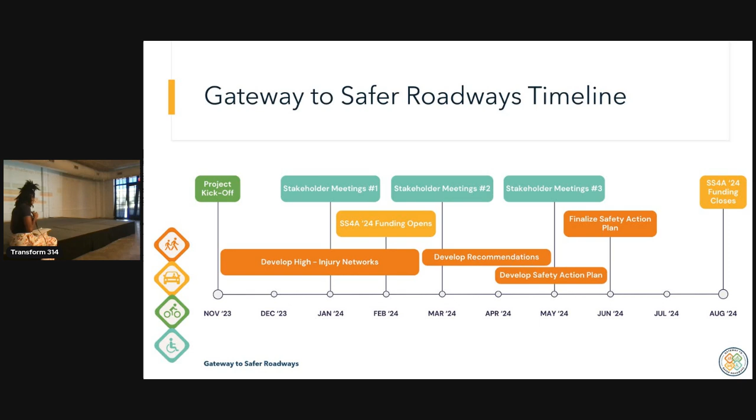Next slide, please. Going back to the funding, why we even applied for this in the first place: roadway crashes are the leading cause of death for ages 8 to 20 and for young adults, and the second leading cause of death from unintentional injuries in the US.

So it was very critical that we come up with this plan. To give you some numbers, from 2018 to 2022, our region had 9,576 fatal and serious injury crashes. And like I said, it keeps getting worse.

Next slide, please. For our action plan, we reviewed the best practices happening across the nation. We engaged with local stakeholders through multiple groups and task forces. We also completed a safety analysis on crash data for the whole region. All of this together makes up a well-rounded safety action plan for the region.

We had a consulting group called Equitable Cities, out of New Jersey, Black-owned, I'd like to note. They helped us make sure equity was woven all the way through the process. That's their specialty, equity first.

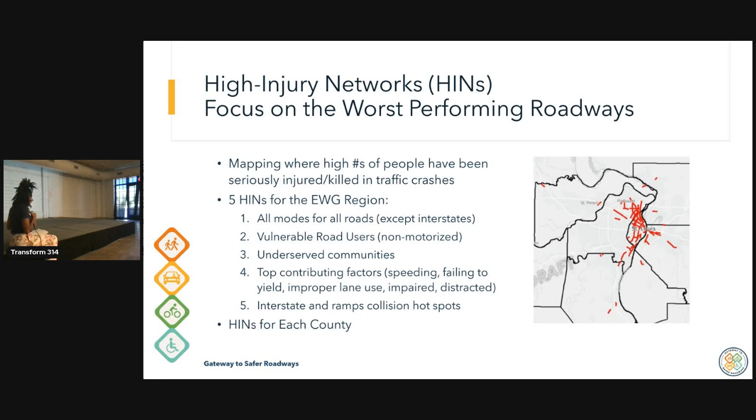Yeah, it's mostly just around the urban core. And so some of our more rural counties, they didn't really show up on the injury networks, which is a good thing, that they don't have a lot of fatal and serious injuries, but we wanted to make sure that with this plan, they could still get something out of it. I'm not sure if y'all been through Franklin County before, Jefferson County, but it gets dark. That's not some place you want to be walking. So we want to make sure they have what they need as well. Next slide, please.

So this map, again, it's a little hard to see, but this is our regional all-modes high injury network. When you get the slides, you'll see some lines in red, which are our top 10% of fatal and serious injury crashes happening in the region. The orange is the top 25%, and the yellow is the top 50%.

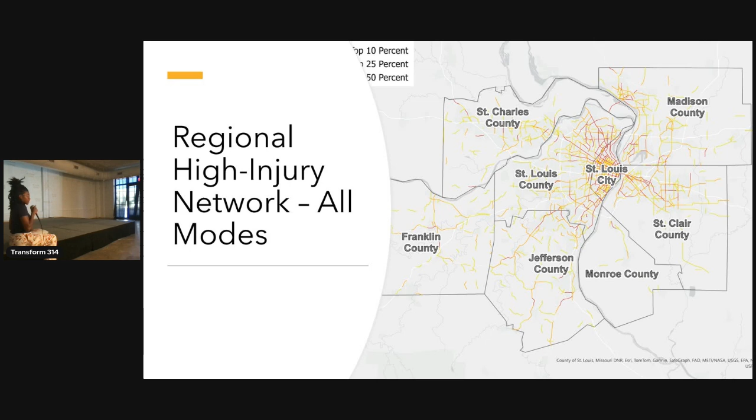You can see that the highest concentration is in North St. Louis, the urban core, the city of St. Louis. We did put this and all the other regional high injury networks on our website, so if you want to take a look outside of the presentation, you can Google East West Gateway high injury network and it'll show up there.

Next slide, please. We did dive a little deeper into the crash data, and we looked at some systemic treatments that our local roads could deploy to reduce fatal and serious injury crashes. We identified high-risk roadway characteristics and what countermeasures could be used to lower those risks, focusing a lot on intersections, roadway departures, vulnerable road users, and even speed management.

And a lot of those countermeasures that we did suggest are already on FHWA's website, as part of their suggested safety countermeasures list. But going back to our county level stakeholders, it was important for us to share this information with each county so they could understand the issues happening on their specific roadways and why we might suggest specific treatments.

Y'all, if y'all hear some of them conversations, it gets crazy.

But by talking with the stakeholders, we also learned what measures they could use as an agency and what countermeasures they likely can't or won't use. This really gave us a chance to learn more about challenges our locals are facing, whether they be political, financial, or even just policy driven. It just put everything into perspective.

Next slide, please. The last component of the plan is the policy review. We identified 9 policy and programming needs and opportunities for our region. These are listed in no particular order, but they include speeding, seatbelt use, helmet use, distracted driving, impairment, red light running, bike and ped safety, unlicensed drivers, and roadway departures.

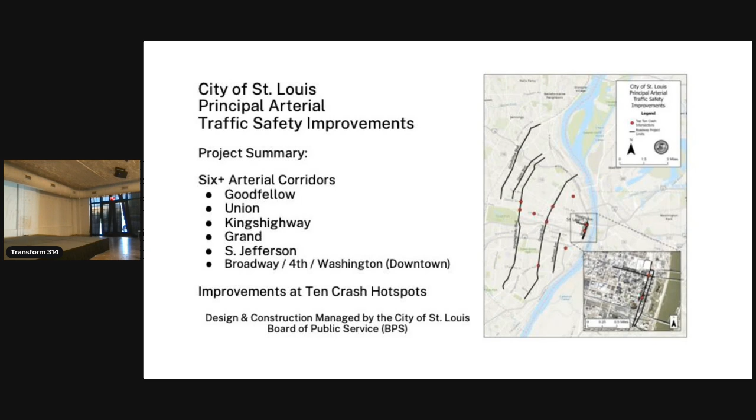Additionally, there are improvements at 10 crash hotspots distributed throughout the city. We picked those based on data, and it's a mix of vehicular crash hotspots and pedestrian crash and injury hotspots.

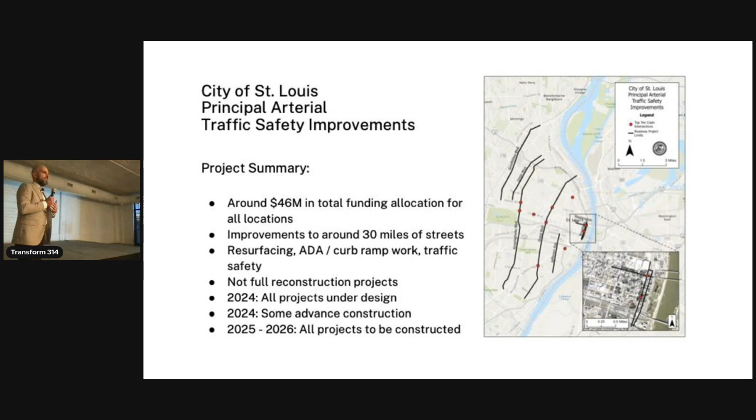Overall, 46 million, which I mentioned, is a little bit more than 30 miles of streets on these corridors. This is something we as a city almost never get to do. We never get to go out and repave a whole street from beginning to end. We were very frequently just doing little bits here and there, 6 blocks here, a half mile over there.

As Betherny mentioned, especially because we rely not exclusively, but primarily on ward capital for funding for repaving, a lot of times that's a ward by ward process. These arterials cross many wards, and they are also the most expensive streets to make improvements to. It's much cheaper to make improvements to a neighborhood street compared to a major roadway.

Common across all these projects, they're all getting fully repaved, so that's the big thing. They're all getting ADA and curb ramp work. When I say ADA work, I mean making the curb ramps at the intersections accessible. Some of these corridors will also get some additional sidewalk work in certain locations. But I will stress that these are not full roadway reconstruction projects.

Has anybody driven on North Jefferson and Parnell lately? Yes. So we recently just completely rebuilt that roadway. Everything is new - sidewalks new, lighting is new, traffic signals are new, pavement's new, all the stuff is new, trees, new landscaping. That's a level above these improvements.

Those types of improvements are going to be like $10 million or more per mile. Here we're more in the $1.5 million per mile range. So we are fixing what's out there to the extent we can with the funding, but we are not completely rebuilding everything.

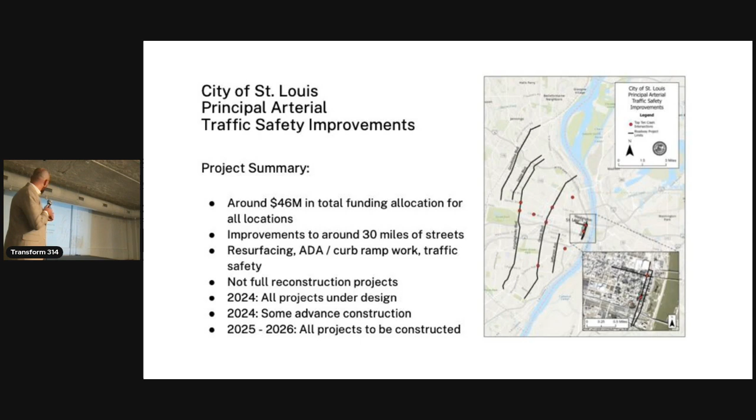So I'm going to run through, again west to east, all the projects, just give you a little project detail on each corridor. If you're really interested in one of these, stop me as we go. There's a lot of similarities, but they're all unique corridors. They're each being designed individually. They will share some features, but there are some distinctions between the corridors.

So Goodfellow, we're resurfacing that from Delmar to Halls Ferry Circle. Parking lane bump outs - I'll say that a bunch, so let me explain what that is now. You know what a parking lane is? On-street parking, about 8 feet wide. Put a car there. When that lane is not occupied by a vehicle, what happens a lot of the time? Somebody uses it to drive, to pass on the right side, to speed. So a lot of these projects will be filling in certain of those spots with little bump outs to make that driving behavior less appealing.

Especially near intersections, you want to keep cars away from the intersection for visibility, both for drivers - you want to be able to see around the intersection, so that's a big safety feature for drivers and vehicles, and especially for pedestrians. Drivers need to be able to see pedestrians, and pedestrians need to be able to see drivers. So we'll be clearing out the parking from those corners, which is a safety enhancement.

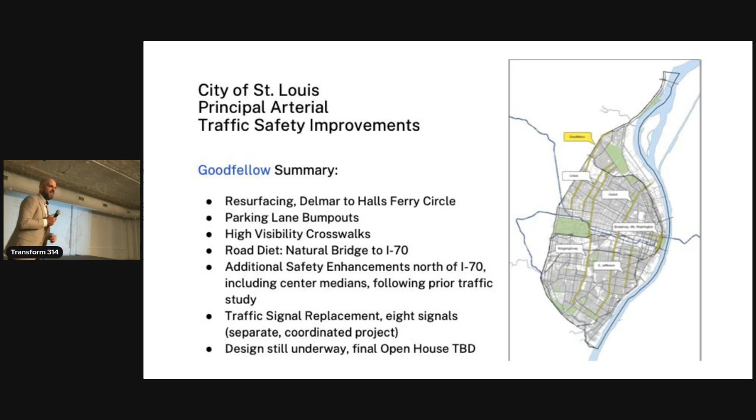We've almost wrapped up design. We haven't had a public open house on this one yet, but we will in the next couple of weeks—not yet scheduled. We'll email Kelly when we schedule it.

Ooh, these are a little hard to see. So one feature I didn't mention, you guys know the really wide segment of Goodfellow south of I-70 and north of Natural Bridge? It's super wide—it's the widest street in the city of St. Louis.

You couldn't do it, it's impossible. You probably could—it's like 100 feet wide, which is much wider than it needs to be.

That segment is also getting—it's tough, because if we were going to rebuild that we'd build a totally different street. But since we're working with the existing curbs, we want to shrink the street to the extent we can. So there we're going to do what we call a parking protected bike lane. That's an image of Union, but we'll do something similar where we move the parking away from the curb, build some concrete medians, and the bike lanes will be against the curb.

Is there a lot of biking on that section of Goodfellow now? There's not, but we're trying to do something to eat up some of the roadway space to make driving safer and to make it safer for anybody using that corridor. If you're walking, the sidewalk is small and you might be right next to vehicles, so this moves the vehicle away from the pedestrian. And if you're riding a scooter or pushing a baby stroller, maybe you do it in the bike lane because it'll be freshly resurfaced rather than the sidewalk.

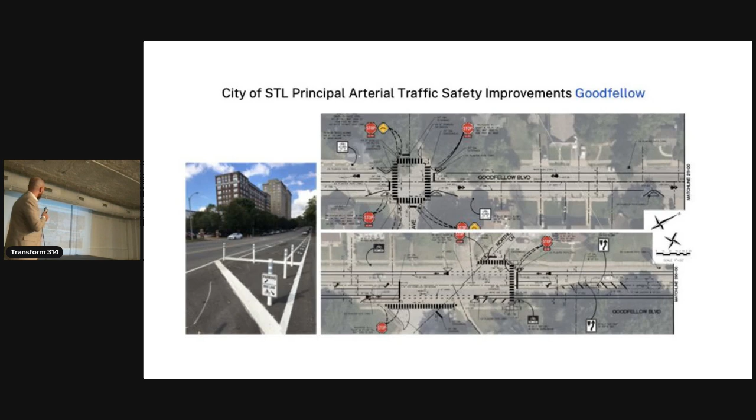Union. Union is probably the lowest volume and narrowest of these roads overall.

It's getting resurfacing, Delmar up to West Florissant, parking lane bump outs again, high visibility crosswalks. Right now the bike lanes on Union go from the park up to just north of Page, so we're going to extend them from Page to Natural Bridge with this project. And it gets curb ramps and ADA improvements at all the intersections.

We have the open house for this one scheduled for next Thursday if you want to see it in more detail. I can tell you where it is—hold on. Yes, Williams Temple Church of God in Christ, 1500 Union Boulevard, 63113. You'll be there—all right, see you next Thursday.

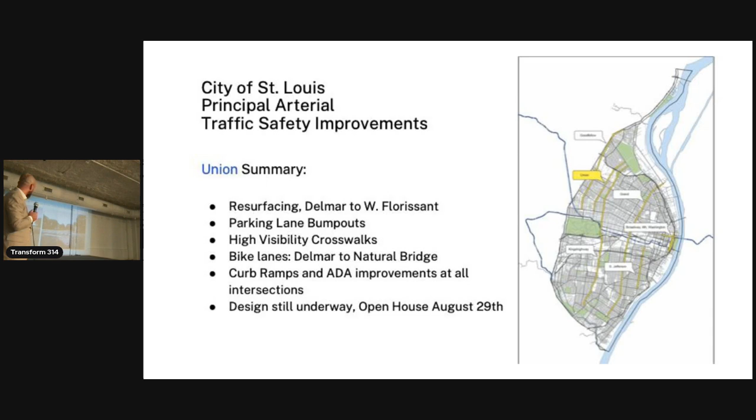That's an image of a lot of those parking lane bump outs we'll be doing—I think that one's on Arsenal in Benton Park, but they'll look a lot like that. In some cases, if they're at an intersection, we like to put the stop sign on them because it makes the stop sign more visible. But they'll also be mid-block in some locations, just taking up space. Most of the bike lanes will be conventional bike lanes in this stretch because we don't have room for parking protected bike lanes.

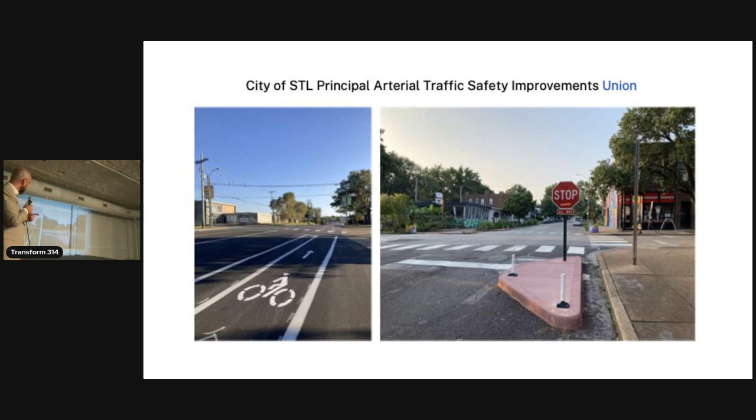Kingshighway. The next two are the big ones: Kingshighway and Grand.

Kingshighway and Grand vary a lot through the corridors. They're long corridors, 9 miles each. So we're doing different things in different parts of these corridors that are context specific to the amount of traffic and the adjacent land use.

So the whole thing's getting resurfaced. The whole corridor will be ADA accessible, at least all the intersections, and that's a big deal. If you're riding a bus or using a wheelchair or other mobility device, there are lots of places where you encounter a lot of difficulties in St. Louis just using the sidewalk or navigating an intersection. So really happy to see the whole corridor end to end be ADA compliant.

At the south end, we're doing a road diet, adding some bike lanes where the traffic volume is much lower. A big part of this project—we had a real safety issue from Lindell up to Dr. MLK, so that segment is getting more funding so we can do more improvements. There'll be a road diet, a center median, and a variety of traffic calming features, hopefully to get vehicle speeds down.

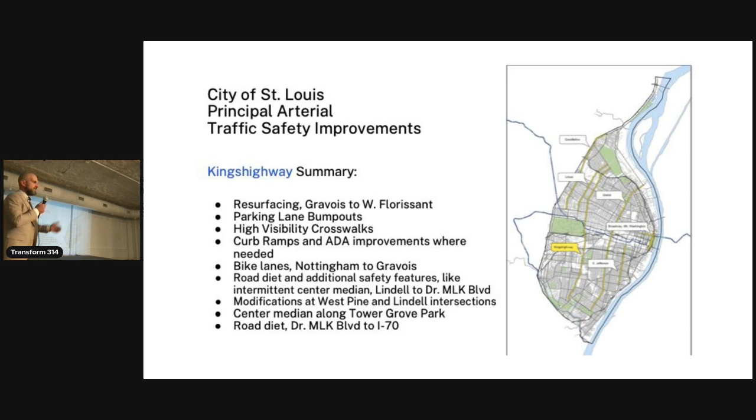North of MLK up to I-70, this part's already under construction. Right now it's 3 lanes on each side of the median. We're taking that down to 2 lanes, and the curb lane will be a parking lane instead of a driving lane. We're also doing a lot of crossing safety improvements, building crosswalks through those medians. Right now if you're crossing Kingshighway, you're kind of going around the median. The sidewalk will go straight through the median, which is safer, so you're not exposed to vehicles. That's already getting built.

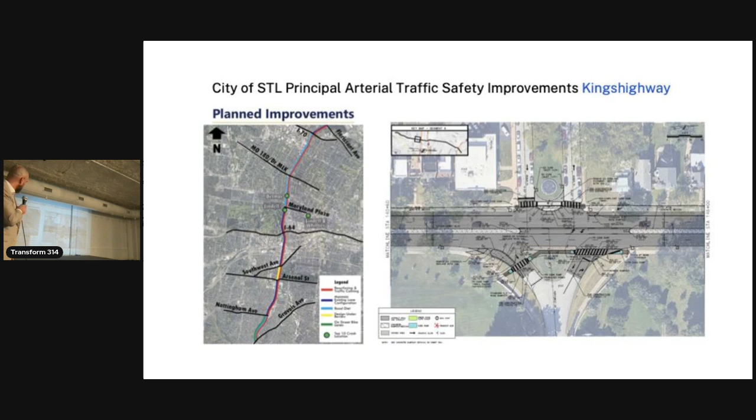Those are hard to see, but on the right you can see that median adjacent to Tower Grove Park, with some modifications to the entrance. And here you can see some of the stuff already under construction on North Kingshighway.

Next up is Grand. One of the super exciting things about Grand is North Grand is really high on the list on the high injury network for fatalities and serious injuries. So we were resurfacing Grand, but we get a bonus on North Grand because Great Rivers Greenway, in cooperation with the city—both the city and GRG are funding this project—are building the Brickline Greenway on North Grand. It's a super cool project.

Next year we'll be repaving all of Grand, but the Brickline will also be under construction at the same time, and that's a full rebuild project. So everything, the whole right of way, will be taken from the very insufficient state of that road now to as nice as you can make a street. It'll be safer, it'll look tons better, there'll be a multi-use facility for bikes, runners, just public space for people. That is also just one of the most unsafe stretches of road, so it should become much safer for everybody using it. That's a huge highlight.

Then north of there, this project is going to allow us to build parking protected bike lanes to extend the connectivity along the east side of Fairground Park, and then continuing north to the Hyde Park Water Tower, then Hall Street.

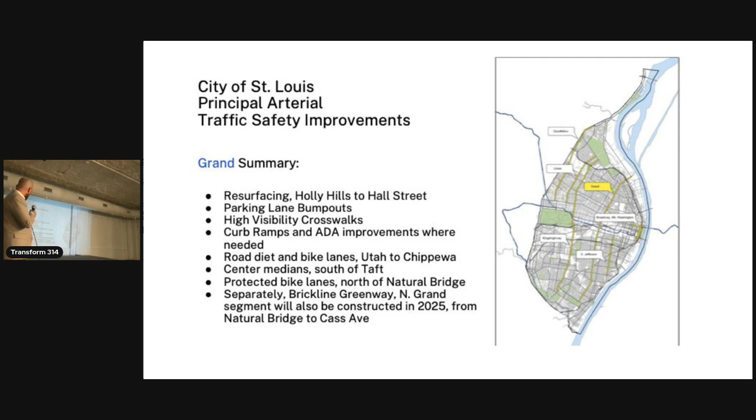And I think those are the highlights. Next slide.

I think we're hopefully going to do some cool bus stop markings on this project. Grand, as you guys know, is probably the highest ridership bus route, best service, not as good as it used to be, but hopefully coming back to more frequent service. So we want to highlight where those bus stops are and make sure drivers don't park in it and block the bus stop. Hopefully we'll do some cool bus stop markings through this corridor.

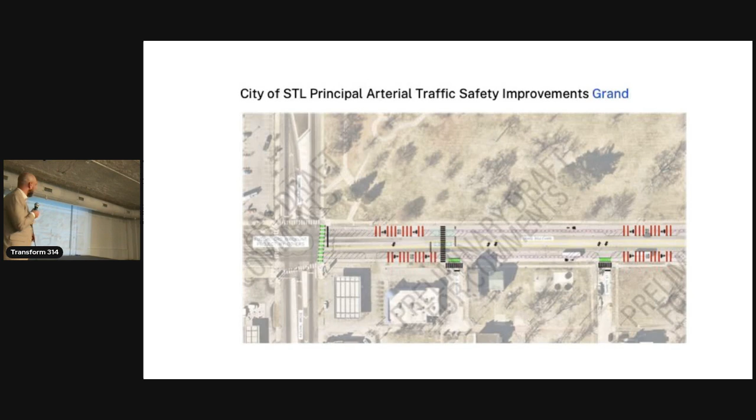Slide. This is a slide of Brickline Greenway. We could do, maybe you've done, a whole session on this project. They would love to come talk to you about it. But it's just super cool. You can picture North Grand in your mind right now and here. So just kind of run through it.

New landscaping, new trees, sidewalk, a planting strip between the sidewalk and the multi-use trail. The multi-use trail will look a lot like the segment that's right by the MLS stadium on Market Street right now, same kind of brick line detail down the middle. More landscaping, big landscaped bump outs at the corners, a road diet so it'll be three lanes, much safer to cross Grand, and we'll definitely have a traffic calming effect.

We would love to be able to do this type of project everywhere. We can't do it everywhere because this is like $25 million a mile, and we've got 1,300 miles of street in the city. That's what it takes to go from zero to hero in your streets. But I think this is the best work we can do, and you can also take elements of this type of project and put them into other projects, even if you can't do the full thing.

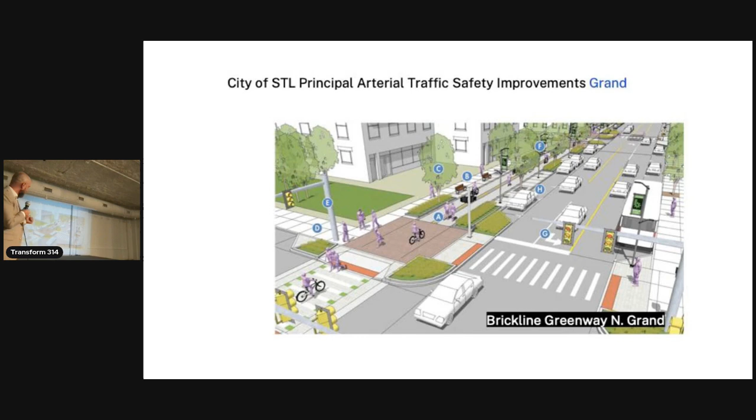Slide. And then South Jefferson — sorry, Craig, this is the most boring one, because South Jefferson, Craig lives near there. South Jefferson is also the line for the future Metrolink Green Line expansion. So we didn't want to go too far on this project because it's kind of an interim resurfacing, since the city is working very hard towards accessing federal funding to try to build Metrolink Green Line. That'd be a great session too, Kelly. So just resurfacing and some safety improvements on South Jefferson.

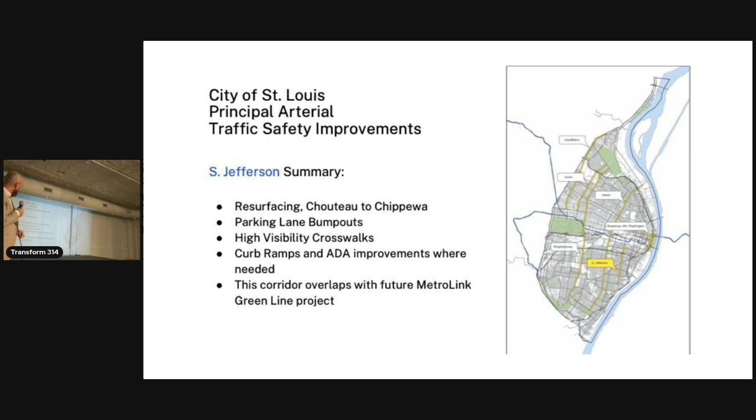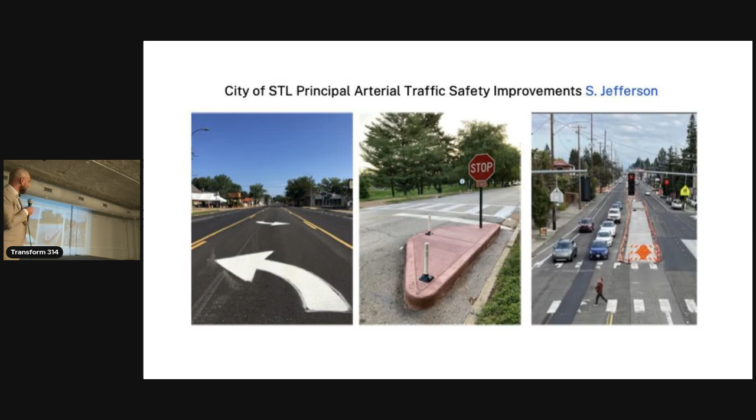Slide. One thing I'll point out, we've got a bad intersection, Gravois and Jefferson, so there will be some safety improvements there. There's some dead space that's like a center turning lane, but it's not actually a turning lane, so we're going to fill it in with medians, make the crossings safer, and hopefully we'll have a safety project on Gravois just east of here also.

Oh, I forgot downtown. Okay, downtown, 4th, Broadway and Washington. 4th and Broadway are pair streets — 4th goes north, Broadway goes south out of downtown. So we're going to add a cycle track on 4th Street, a two-way bike facility, so there'll be one less vehicular lane. This will be protected by a concrete median, taking you in and out of downtown from the south. And then Broadway, the next street over, will get a road diet with a lot of bump outs. It's just very wide, and traffic volume is down since the pandemic — these streets just don't need it, rush hour peaks are just not what they used to be.

So they're too wide, and especially at night you get people driving crazy, so we're going to try to slow them down. And then Washington—there's also periodically, I think it's a lot better than it was a few years ago, but some reckless driving behavior.

So Washington's getting some updates, and we're doing a raised intersection at Washington and 8th, in front of the convention center. There's a lot of pedestrian activity there, and the convention center worries a lot about pedestrian safety. So we'll raise the intersection up, so the whole intersection is like a speed hump. Hopefully that slows vehicles down and makes it a prominent location that drivers respect, and we're doing some other safety improvements there too. So those are our $45 million of ARPA-funded street improvements.

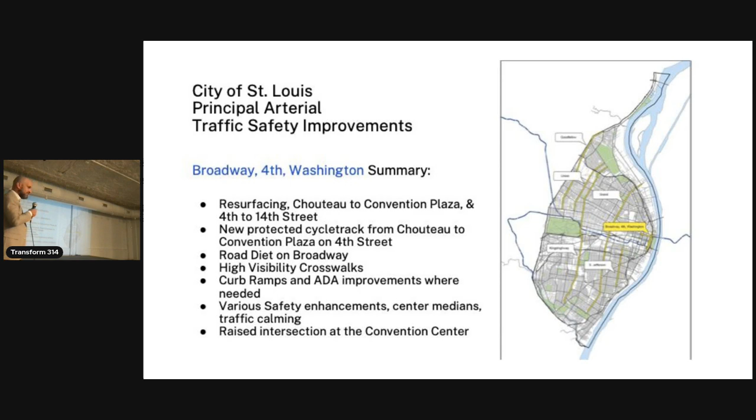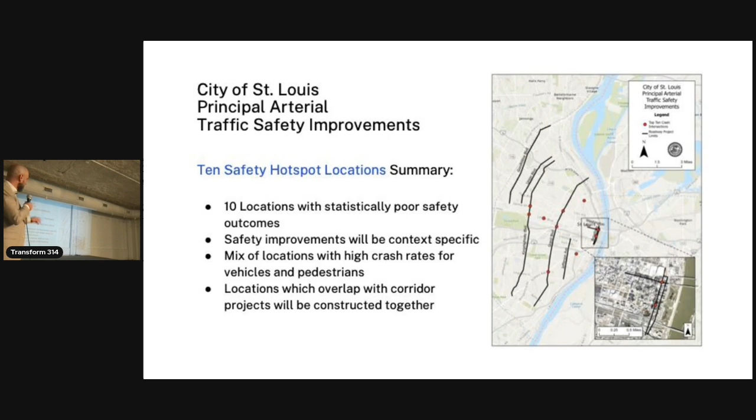Next slide—you can kind of see the cycle track there. Next slide—the hotspots. We're also doing spot improvements throughout the city. I mentioned we picked these based on high vehicular or pedestrian crash locations. These are basically intersections where we either did or did not have a corridor project and thought needed help anyway. So some of them are on the corridors, which means we get to put a little more money into those locations. Some are off the corridors, but we'll do some spot improvements there.

So this is kind of a sidebar—I've got 3 minutes.

We put up a really nice map recently of all the city's major transportation projects. I think we still struggle to communicate what we are doing, but we have a much higher level of investment in projects right now than we did 5 or 6 or 7 years ago. We want to tell the story about those projects, and let people know they're happening, because we fund them and then a lot of the time it takes several years to actually build them.

So if you scan that QR code or go to that long URL at the bottom, you can see a description of all these project types, the kind of stuff we're doing, and an interactive map that has all of the major projects. These are not ward capital projects—these are big projects across the city. It'll give links to websites with more information, hopefully a project year or when it'll get built. We intend to keep this updated so we can communicate better with residents across the city about where we're making investments.

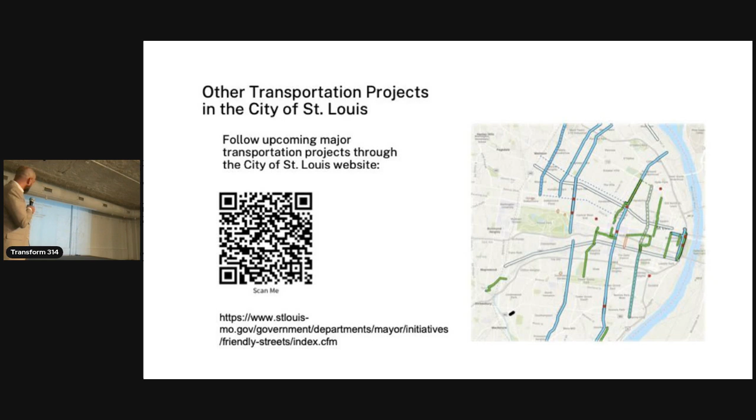And then I've got a couple slides about some of the stuff on that table. So the city, also funded by ARPA, is doing a citywide transportation mobility plan. It's very exciting for me because I work in planning. Does anybody know—does the city have a transportation plan? No, we don't.

Very unusual for a city not to have a transportation plan in 2024, or 2014, or 2004. So we're finally going to get one. We haven't really done this since like the 60s, when we were building highways, and the transportation paradigm is different now.

So the big thing—this is not so much about projects. We've been talking about projects, but this isn't really about projects. This is about what do we want to do with our transportation system. What are the values? What's our vision for it? What are the goals? What are the things we care about?

When I say value, it's like, do we care about roadway capacity more? Do we care about safety more? Do we care about building new things more, or do we care about maintaining the stuff we have more? So this is a chance to talk to residents all throughout the city and get input on these basic things—what are people's priorities?

We're doing that right now. There's a statistically valid survey that we're doing right now, and then we're going to put that up online so you all can take it once we get enough initial responses. We've got 4 open houses coming up, which are on the next slide—well, they're on the next slide, but we'll stay here.

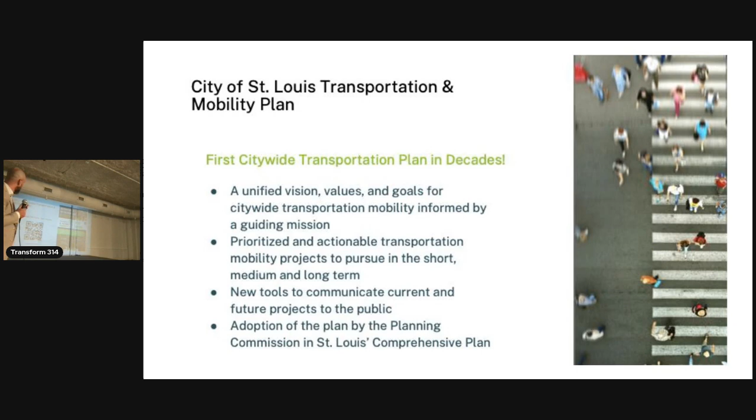But just some highlights—values, vision, goals. We've been doing a lot of interviews with city staff at the beginning of this process, so they know about it and can give us input. We're also working on a policy and ordinance review—there's lots of policies and ordinances that touch on transportation or transportation funding in some way, so we're working through those.

We're working through a street design guide that forms a baseline of what different types of streets in the city look like ideally. We're building off of the safety action plan, taking all that data, and we're already using the data Christie was talking about. We're already getting our first project teed up from that, which I can't talk about in detail yet, but it's great data. We're going to build more into what the city can do to respond to it, and that'll go into the Transportation Mobility Plan.

We had our first community advisory meeting, Mr. Stringfellow is on the committee. We're really in the gathering input phase right now from the public, and later in the fall and winter we'll get into plan development and writing the plan. But now is when, if there's something you care about, you can go online and tell us right now on the TMP website, take that survey that's coming up.

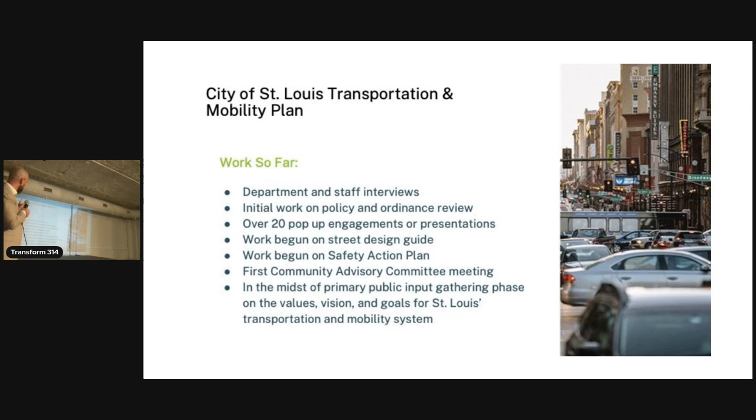I'll go to the open houses. We've got 4 open houses, we've got paper over there, and they're on the website. This is just a chance to come through and talk to the project team about your goals and hopes and dreams for transportation in St. Louis, and we hope you come. First one is the 21st I think. We've got a Central West one, a Forest Park one, a downtown one, a north one, and a south one. Everybody can come to all 4 if you want. They're coming up late September, early October. Thank you guys.